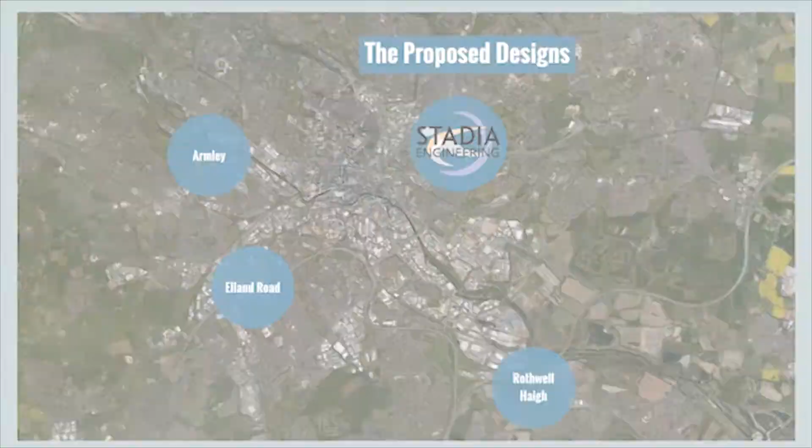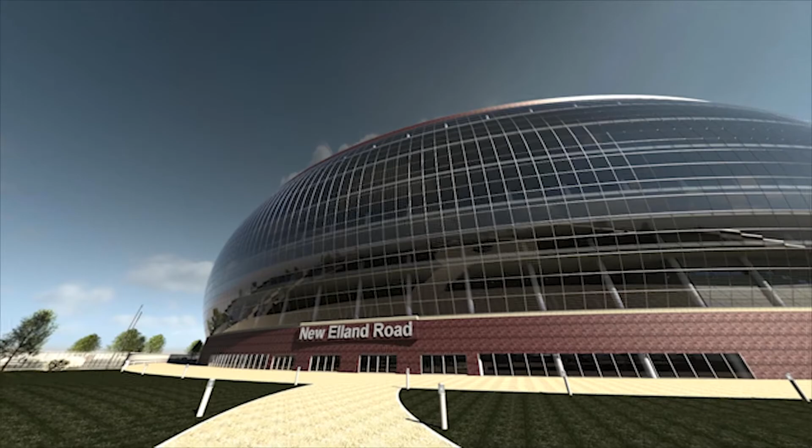The structure itself consists primarily of a reinforced concrete superstructure, formed from large concrete columns and beams supporting 10 levels which provide a total floor area of 280,000 square metres. The roof is composed of an aesthetic steel truss covered with durable and aesthetic polycarbonate sheeting, large enough to cover both tiers.

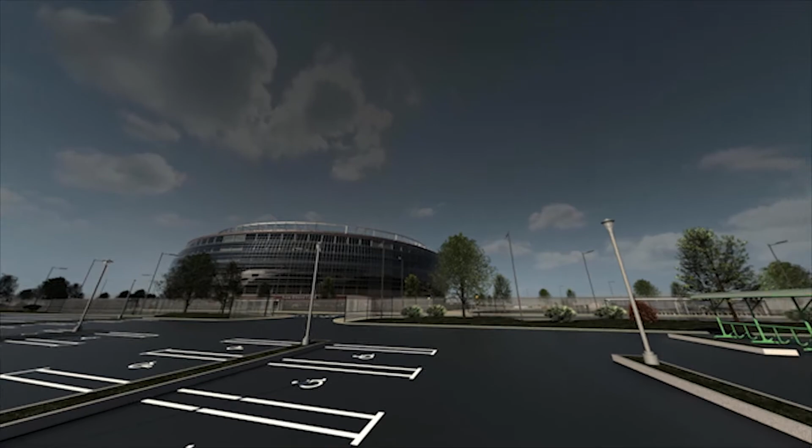The structure is finished with an elegant curved polycarbonate glaze, providing a strong and visually impressive appearance to a structure which is visible and appreciated from miles away.

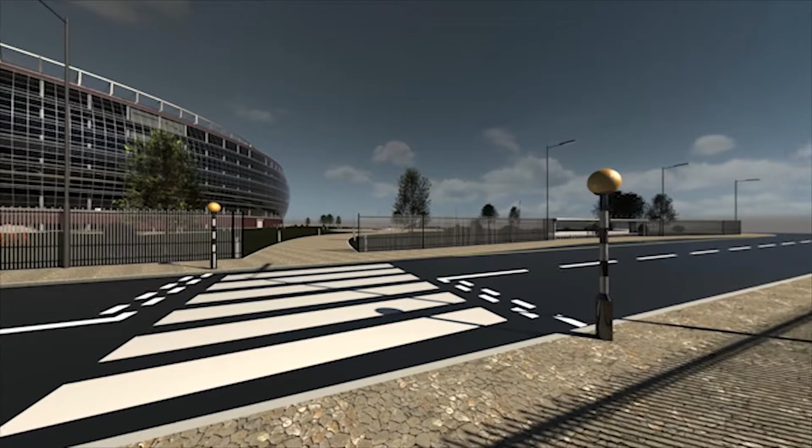The ground floor of the stadium is where spectators will enter. To safely control the influx of people, turnstiles and security systems such as CCTV will be utilised. A range of facilities will greet visitors as they make their way through the concourse.

Shops, bars and restaurants will entice customers, but most importantly this floor will house several information desks which will provide information in a variety of languages to accommodate the international tourists visiting the Games.

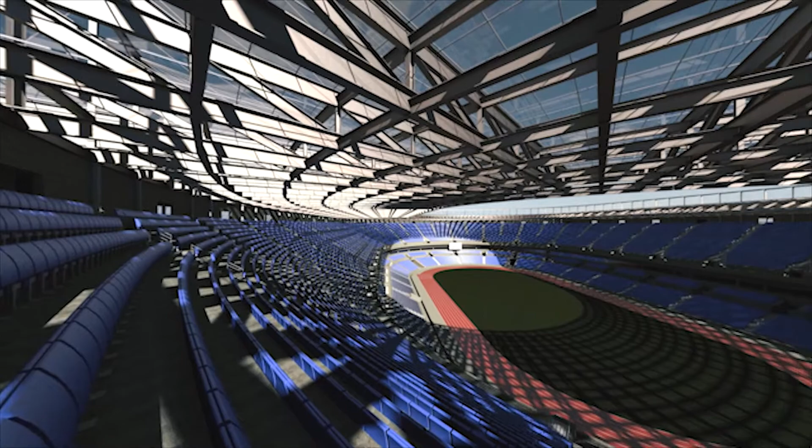Floors with vomitorium access to the seating will contain comfort facilities including toilets accessible to everyone, as well as concession stands which will be available to rent, providing a fantastic revenue generating opportunity.

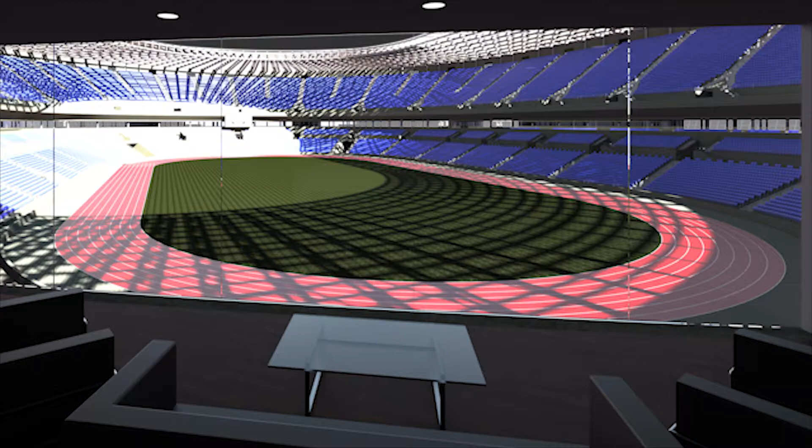The media room, the royal box and VIP suites will be situated between the first and second tiers. These suites will provide customers with a luxury experience that can't be experienced in any other area of the stadium. One particularly innovative idea is the retrofit, transitioning the athletics arena into a football stadium.

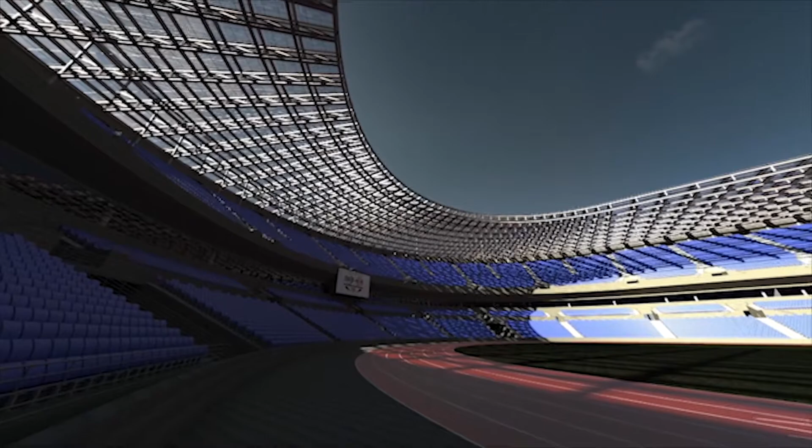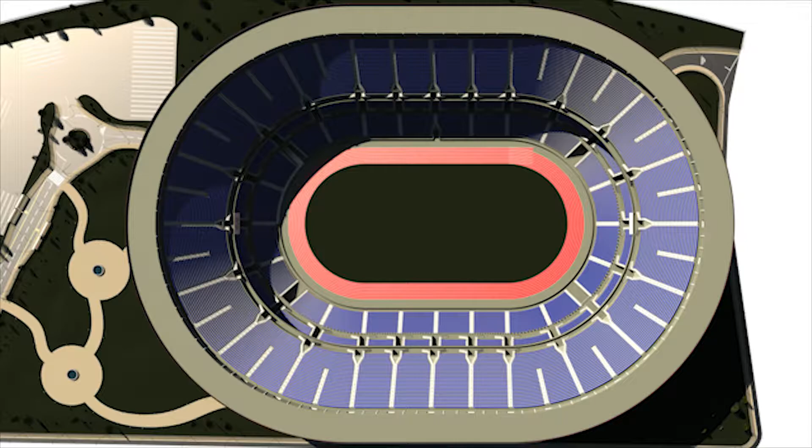The proposal is to provide the sporting arena on 12-metre platforms, and once the Games have concluded, the platform is removed to introduce one further tier of seating for future football occupancy. This provides football fans with seats close to the pitch to ensure an outstanding atmosphere and viewing experience.

STADIA Engineering is committed to installing environmentally friendly solutions in all its designs. New Elland Road Stadium shall incorporate a number of renewable energy and energy-saving solutions throughout, including solar panels, rainwater harvesting and energy-saving lighting.

The rainwater capture system is capable of storing up to 14 days of water demand for the facilities within the stadium. It is estimated to save up to 25 million litres of drinking water every year, up to half of the stadium's water usage.

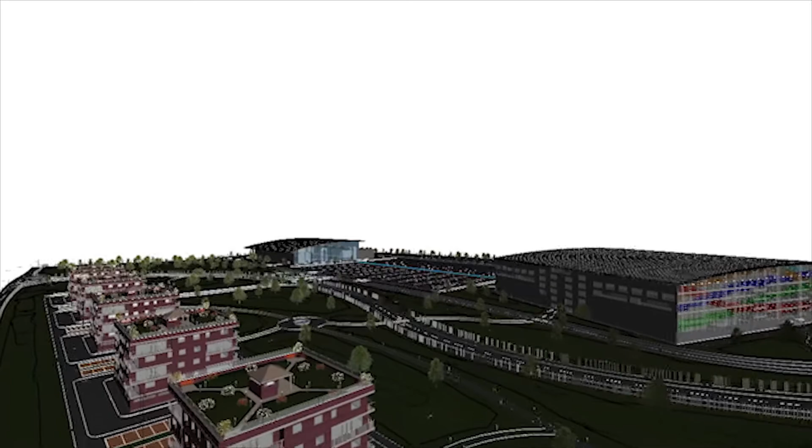In total, it is expected that 9,000 athletes plus their entourage will descend upon Leeds throughout the duration of the Commonwealth Games. STADIA Engineering have designed 3 different areas to accommodate all participants: existing student halls, an athletes village in Armley and new housing at Rothwell Haigh.

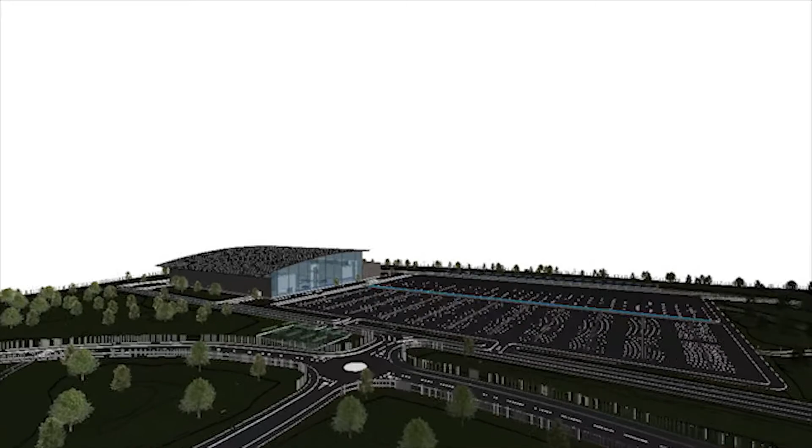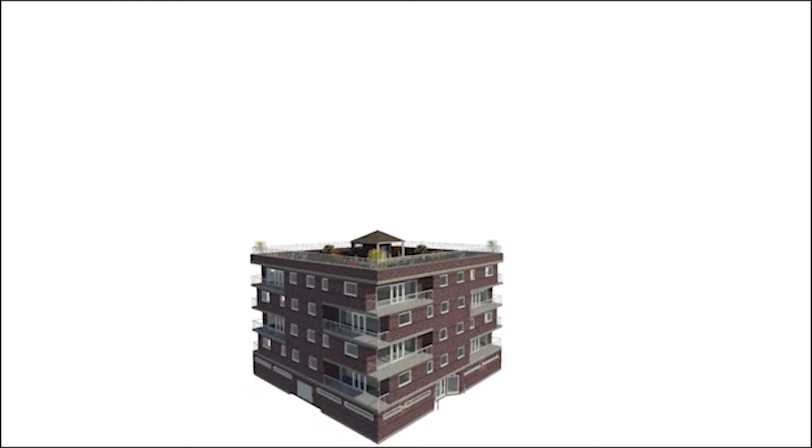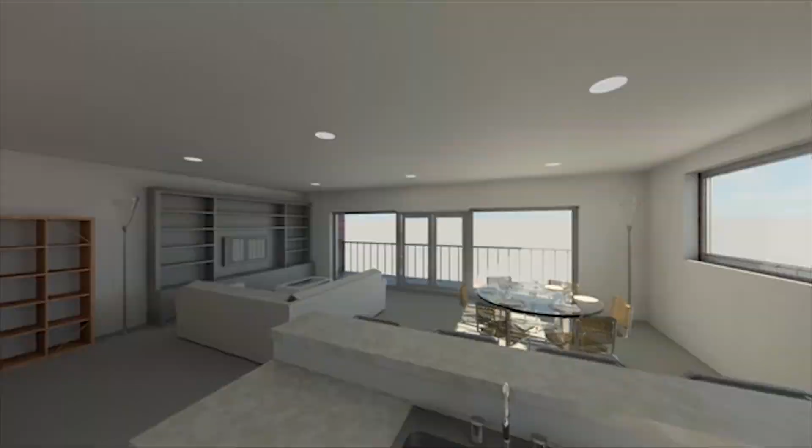The Rothwell Haigh accommodation consists of 10 apartment blocks with a combined total of 160 luxury flats, each with 2 bedrooms, 2 bathrooms and a private balcony. Each apartment block comprises ground floor parking, bike racks and a roof garden, which provides stunning views across the site and the wider area of Leeds. Once the games have concluded, it is proposed that the flats are to be provided as luxury student accommodation, ideal for postgraduates, final year students or others who prefer a quieter and greener environment.

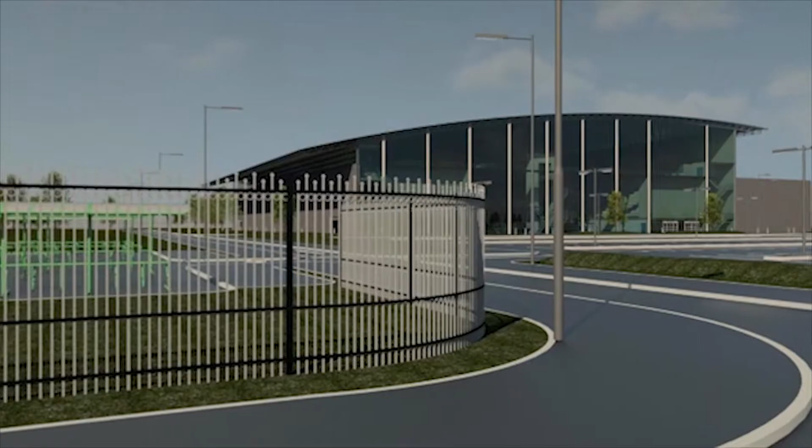Supporting New Elland Road, STADIA Engineering have proposed a multi-purpose facility at Rothwell Haigh to host the swimming events, whilst providing a sporting hub post-games to realise Sport England's ambition of encouraging community activity.

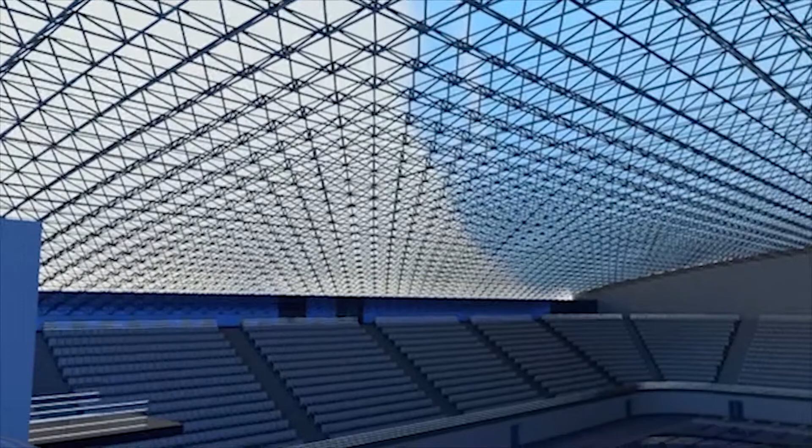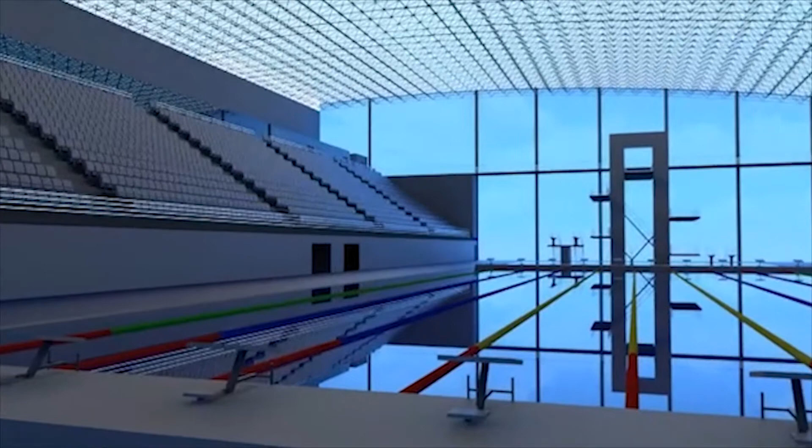The aquatic centre itself will comprise of 2 primary floors utilising a bespoke extended space frame truss atop a reinforced concrete construction. The feature room will house Olympic regulated swimming and diving pools, surrounded by 5,500 seats for spectators.

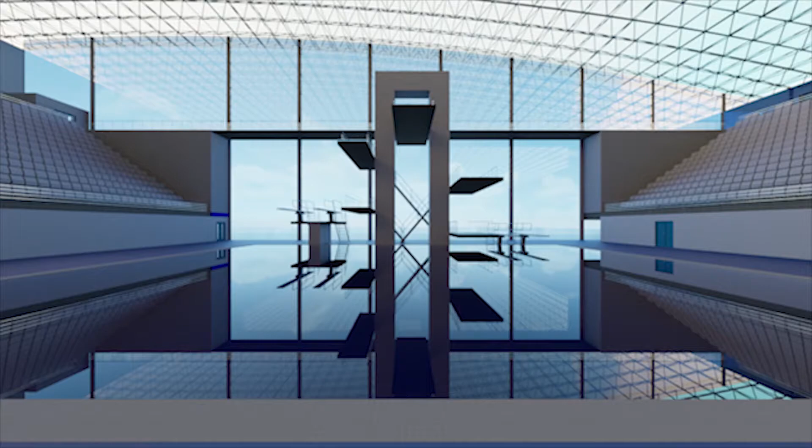We have designed the room to allow large volumes of natural light to flood the room via the sprawling curved roof and expansive glass wall behind the diving pool. We believe this provides a warmth and serene environment to the room, inviting competitor and spectator alike.

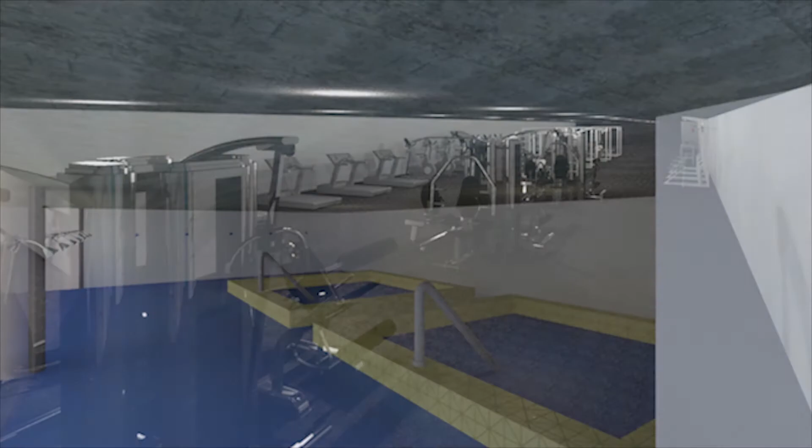Additionally, a multi-floored recreational gym will be provided with an adjacent spacious gymnasium for multiple indoor sports, along with typical amenities and facilities found within the main stadium.

To enable the gymnastics events and provide an additional venue for Leeds to host a variety of entertainment and sports nights, STADIA Engineering have proposed a development situated within Rothwell Haigh, parallel to the aquatic centre.

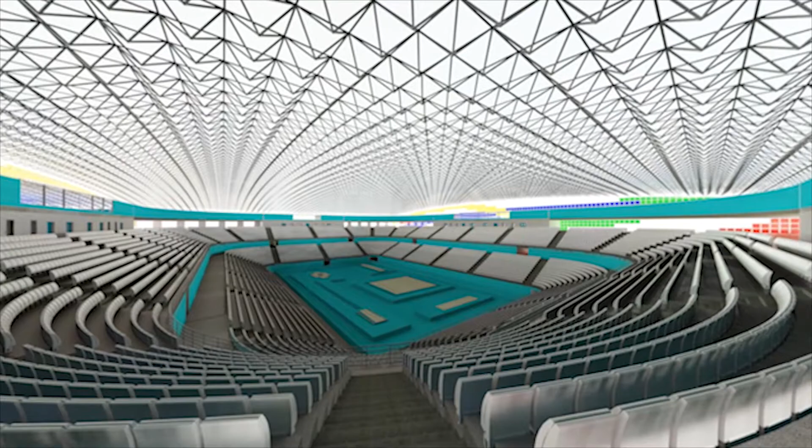The gymnastic arena consists of 6 floors, taking inspiration from the internal layout from New Elland Road. The structure will be largely reinforced concrete in construction, with a bespoke space frame roof to support the internal arena area. The main room was designed with 2 tiers of seating housing 8,000 spectators, which are ideally located to provide maximum viewing pleasure for events.

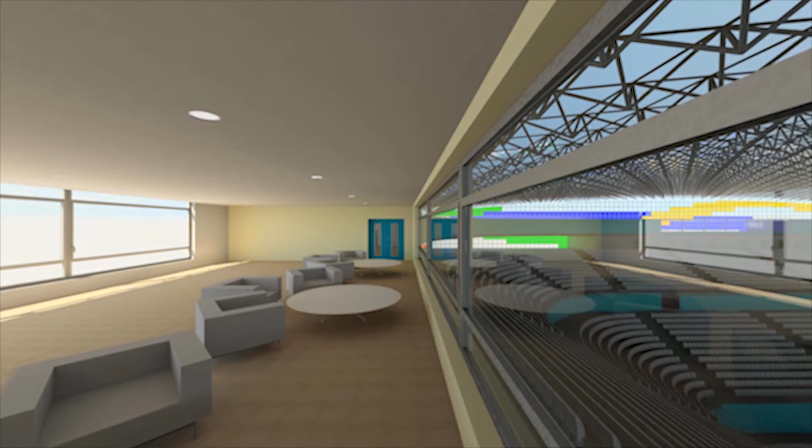We allocated the performance area enough space to house the gymnastics initially, whilst ensuring other sports or acts to perform would be seen adequately. Additionally, concession stands, sanitary facilities and congregation concourses throughout the structure, ensuring accessibility and safety are paramount for all users. It is hoped that after the games, the arena can be used for entertainment events such as sports, music artists and comedians.

This provides support for the First Direct Arena within Leeds as increased popularity and development takes place after the Commonwealth Games.

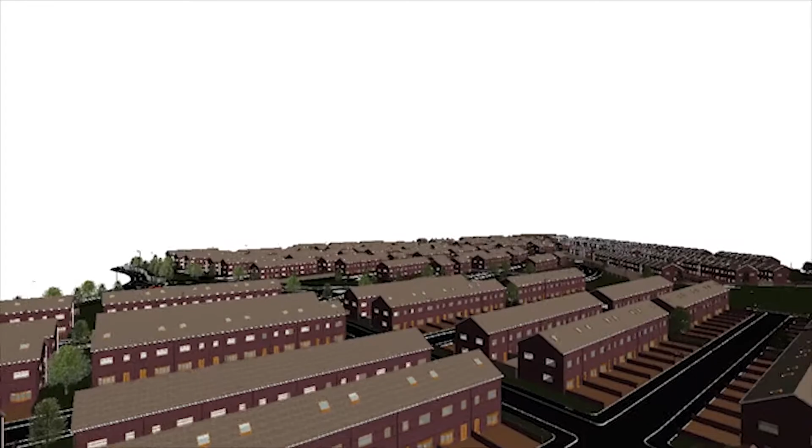The Athletes Village will be located in the region of Armley, an area with lots of low quality housing in need of rejuvenation. STADIA Engineering believe that transforming this area into the Athletes Village for the duration of the Games presents an excellent opportunity to upgrade the area and leave a lasting legacy.

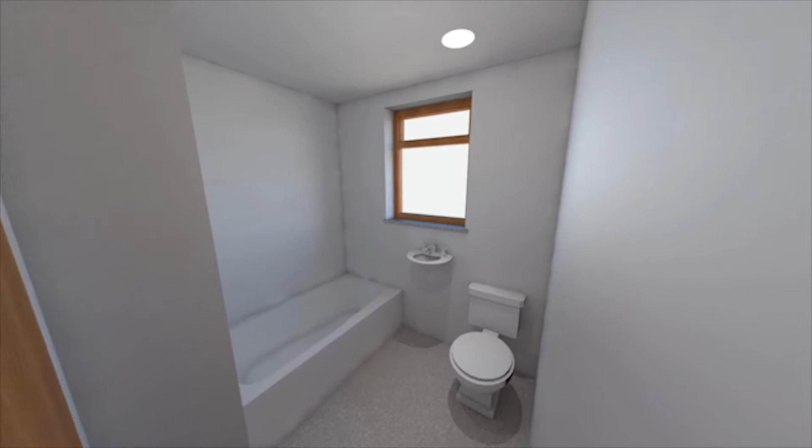The proposal is to replace the low quality housing with 840 new 3-storey terraced houses. Each house has 3 bedrooms, an attractive living area, a kitchen, 2 bathrooms and various sized private gardens. The arrangement of the houses is to maximise the use of space whilst providing plenty of green spaces for the athletes and future residents to enjoy.

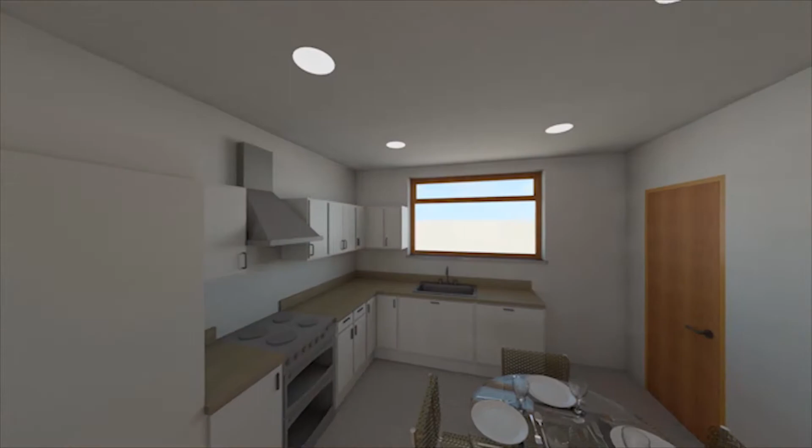After the Games, it is hoped that the housing will contribute to Leeds City Council's affordable housing scheme, offering better quality houses to existing residents and introducing more housing for potential buyers.

The site is ideally located next to a disused railway station, which will act as the focal point of the Commonwealth Games transport plan. The station is located between Leeds and Manchester and will provide a direct transport link with Manchester Airport. The station has 2 platforms that are accessible via a footbridge with both steps and lifts to allow access for all.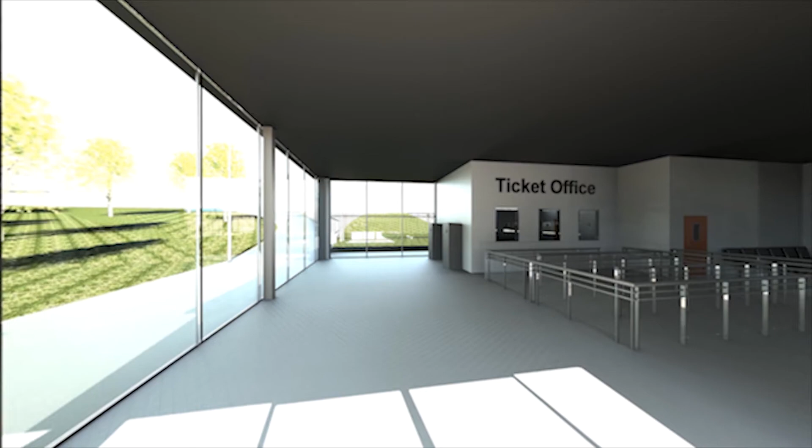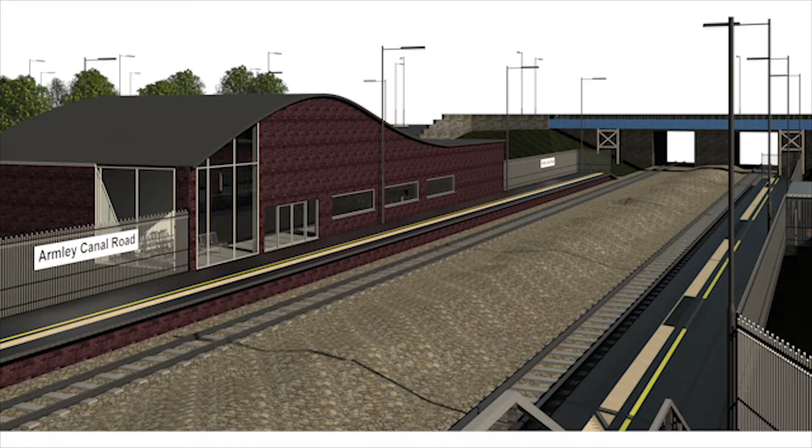The station itself contains 74 seats for both passengers and for collection, and sufficient toilet facilities to handle peak time capacity. Moreover, there will be 2 automated ticket machines and a manned office with 3 ticket booths.

Adjacent to the station there will be a bus station with 4 bays and 3 customer shelters, and it is expected that throughout the Games this transport hub can provide links to all of the main event sites within a 16-minute journey. The transport hub will also provide excellent cycle links around the city.

With hybrid cycle routes around the village joining with Leeds City Connect, a cycle link between Bradford and Leeds. For pedestrian access to the transport hub, a second footbridge has been proposed to allow a safe walking connection between the transport hub and the village.

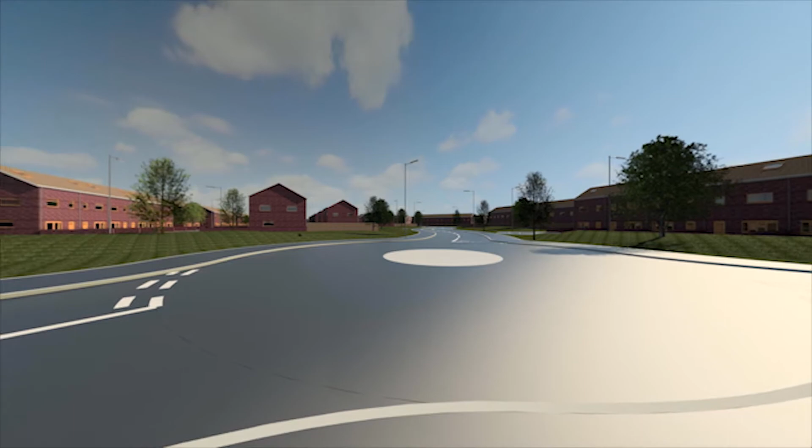It is suggested that after the Games, the transport hub will continue to be a success and will contribute to improving the area of Armley.

STADIA Engineering have ensured the design of all of the developments adheres to the typical structural standards within the UK, satisfying Eurocode and governmental regulations relating to buildings and infrastructure. Particular care was taken for New Elland Road, where a vast MasterSeries model interconnecting structural members was analysed for multiple scenarios.

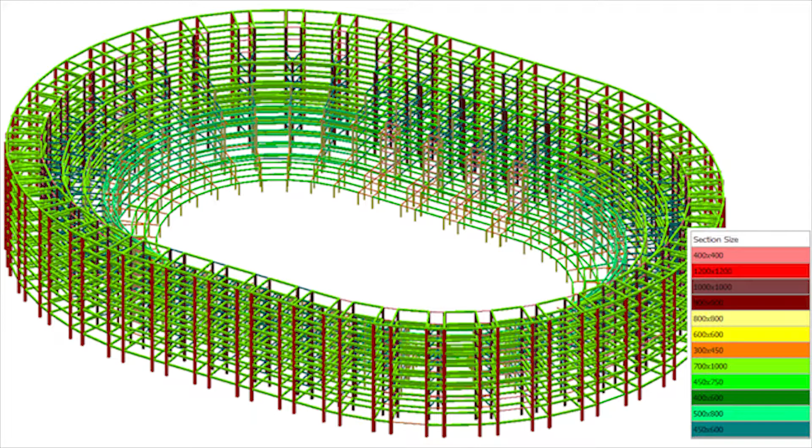STADIA Engineering believes the incorporation of sustainability both in the design and construction is paramount. To monitor and evaluate this aspect, we have adopted the use of BREEAM's 10 principles and sustainable guidance notes. In keeping with the Green Games at the London Olympics, STADIA have targeted very good or excellent ratings for the structures. This was made possible through effective waste management and procurement plans adopted at the construction stage, along with the integrated transport hub and infrastructure allowing high accessibility for all spectators at all venues.

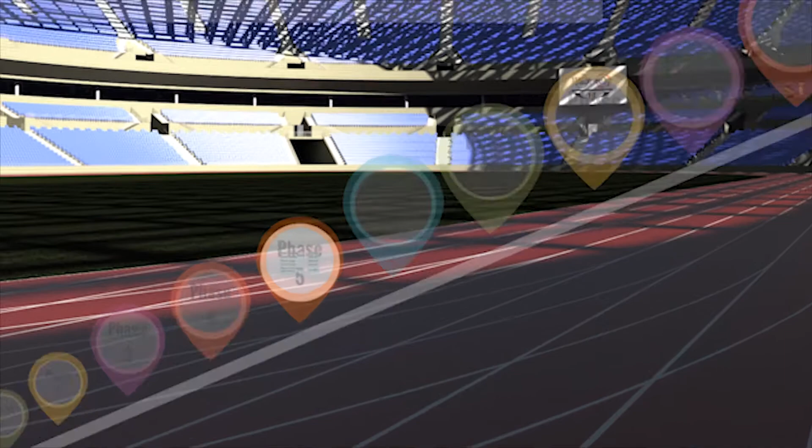The project has been broken down into 12 different phases. The first 5 phases include the bidding process for Leeds to host the 2030 Commonwealth Games. Following the completion of these phases, the construction phase is set to start in 2023, providing a 7-year window to complete the sports village development.

Phase 1 of the construction process is expected to run until 2025. This will involve the demolition and site clearance of Armley and Rothwell Haigh.

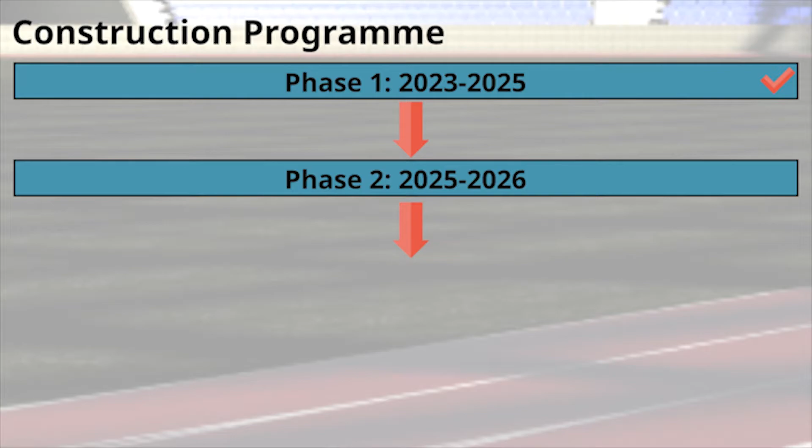Phase 2 is anticipated to take just over a year to complete. This period will see the rise of the transport hub in Armley and the apartment complex, aquatic centre and gymnastics arena at Rothwell Haigh. This will allow revenue to be generated from this point onwards.

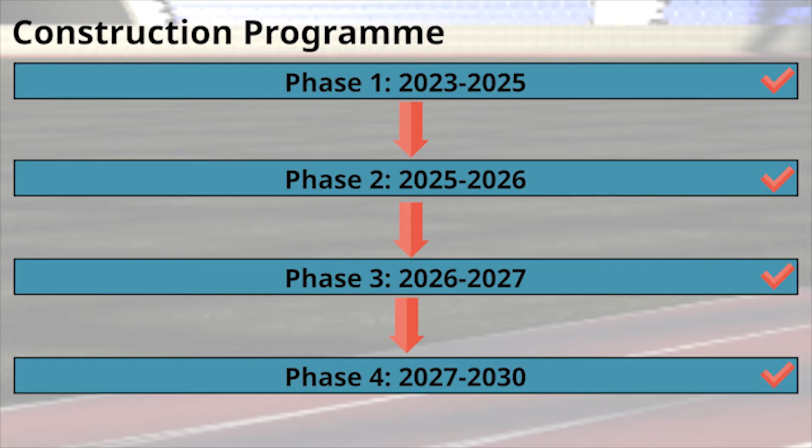Phases 3 and 4 involve the demolition and construction of Elland Road Stadium and the housing development in Armley. These facilities will be ready in time for the start of the Commonwealth Games. Phases 7 through 12 include testing and validation of systems, as well as the final client handover. The project will be completed in 2032.

STADIA Engineering strives to be a forward-thinking company, and we apply this to our management of risk. In the creation of the risk assessment, mitigating actions were assigned to each potential hazard, ensuring a proactive rather than reactive approach to risk was undertaken.

From the analysis, it was seen that the major risks to the project include the loss of the bid to host the Commonwealth Games or planning permission being rejected. To overcome this, a detailed stakeholder analysis was carried out and considered throughout the entirety of the project.

The key stakeholders can be seen on screen. Understanding their requirements is of utmost importance to STADIA Engineering. The legacy and economic prosperity from hosting the Games will ensure Leeds City Council are on track to establishing the capital of the North.

From the SWOT analysis that has been carried out, it can be seen that the biggest strength of the project is that it aligns with the plans of the local authorities, meaning backing and planning permission is likely to be approved.

As a newly formed company, the biggest weakness is the lack of reputation in the industry, meaning it would be difficult to sell the project. However, the socio-economic benefits from delivering the project may lead to further work being awarded in this area.

Delays in the programme is the biggest threat to this project, as it would negatively affect the Games' legacy.

Now for everyone's favourite part, the numbers. New Elland Road will cost approximately £275 million to construct. The costs of the other elements are provided on screen. The total cost of the project is expected to be approximately £740 million, including a 5% contingency.

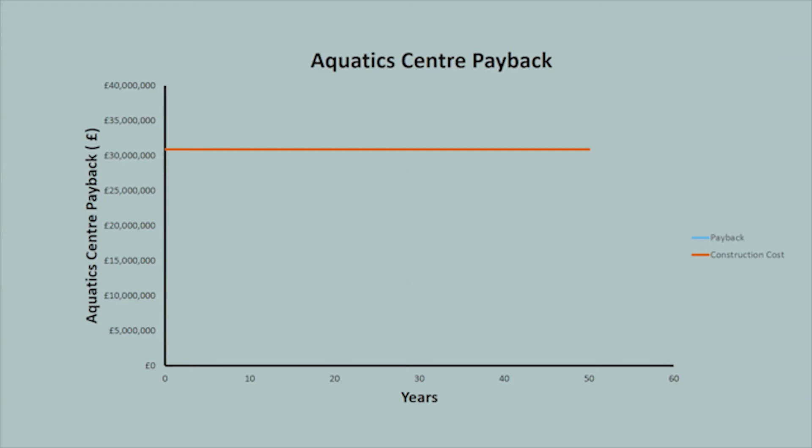This section considers the payback of the key facilities. The stadium and gymnastics arena will take approximately 8 years each to pay back the cost of construction. The aquatic centre is expected to take 37 years before it starts generating profit. However, in the 50-year period, a profit of £15 million is achievable.

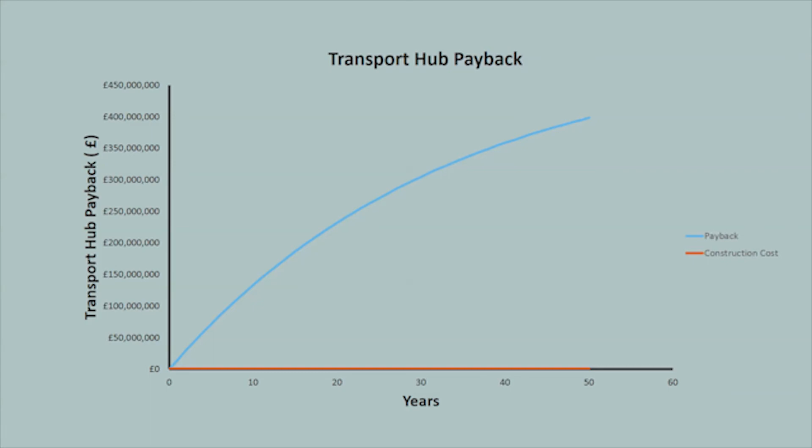The standout design for investors is the transport hub. With the low relative construction cost and constant influx of customers, it is expected to start generating profit after year 1. Over the 50 years, a profit of approximately £400 million should be expected.

STADIA Engineering have developed a bid package that will enable the City of Leeds to host the 2030 Commonwealth Games and cement its legacy as the capital of the North. The project will provide world-class sporting venues, a variety of socio-economic benefits and a high return on investment.